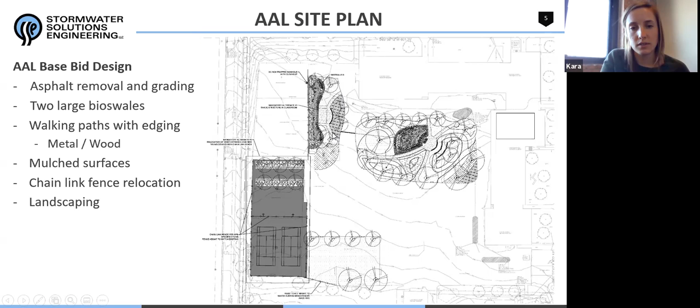The chain link fence currently goes out to here and across, but we're looking to remove all of that chain link fence, relocate it so it goes north-south this way, and then reorientate the parking in this location. So that was part of the base bid.

There's a few alternates for AAL. The first alternate is a shade structure in this location. It's going to be, if everyone is familiar with what we did last year, a monoslope Poligon structure that was spec'd out. We spec'd out the same structure here, and we were able to secure the engineering drawings for those. So if you were to go with a Poligon structure, we could work with you to use those engineered drawings.

Alternate 2 would be all the wood elements. So we have the nature play here, the willow tunnel, the log seating, the seating nooks, and a log border. Those details can be found in the landscape plans.

Alternate 3 would be this whole area over here, where there's an existing tennis court in this location and an existing tennis court here. We're looking to remove all of that asphalt, resurface this whole area, put in new chain link fence around this area, and only convert it to 2 tennis courts instead of having all 4. We'll open up the fence here, creating an entrance through into the playground over here, and add basketball hoops, 2 of them in this location. So all of that work is part of alternate number 3.

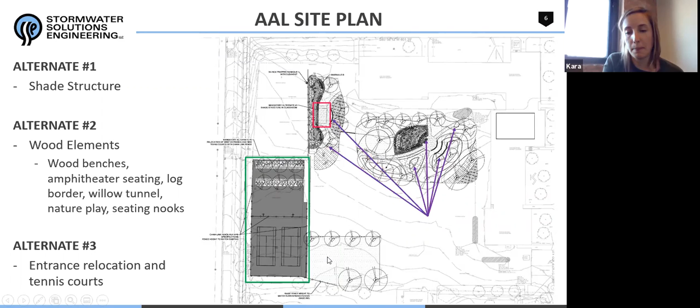One thing I'd like to point out: we did have a sewer investigation done on this property. The survey wasn't fully clear on where some of the utilities were going, so we had a contract and investigated some of that. We will be cleaning out the sewers within the playground prior to construction. There's debris in some of these storm sewers, and there's an electrical line that we found, which you'll see on the site plans.

I was going to zoom in, but that won't work. There is an electrical line that we found that goes through the storm sewer here, so we'll end up bulkheading the storm sewer in this location that's within the bioswale, and just leave it in place. We'll build the bioswale around that sewer.

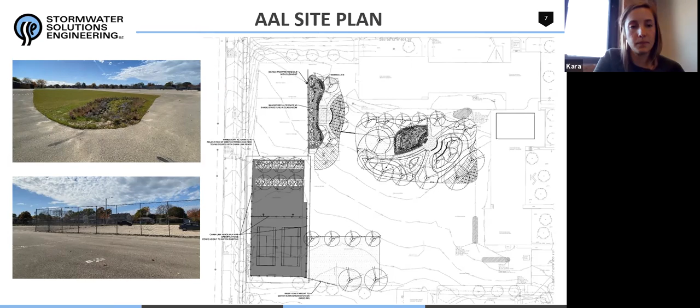The next one is Bay View. Very similar across all the boards, we're looking at majority asphalt removal and grading. Here we have 4 bioswales - 1, 2, 3, 4. And this bioswale here has an underground cistern that is connected.

There is a trap manhole here, so that underground cistern includes a new vault manhole that will get connected to that sewer. Here we have the same walking paths with edging, and we also have a brick border. This is something similar to what we did last year at Clement, where the school had some bricks that were engraved, and we supplemented those bricks and created a border. There will be some coordination on the amount of bricks that we have, or that the school is interested in obtaining for that.

Also here, we have an amphitheater classroom. This is a concrete stage here. This is another classroom in this location as well.

For the walking path right in here. So there's natives within this location and bioswales, and we want to reuse those flagstones from this location as the pathways.

The alternates, right now alternate 1 is the bioswale underground cistern with this diversion. We're looking at redoing this, rethinking what this looks like.

We are not allowed to divert the stormwater into the property, so we'll be changing this up, but it's going to remove the bioswale and the underground cistern.

The alternate 2 is this garden classroom. Right now this is all sod in this location, but we're looking to put in some crushed aggregate here and mulch surfaces so we can relocate the planter boxes and in the future add picnic tables and stuff like that. Alternate 3 would be all the wood elements throughout the site, the seating, the borders, and nature play, everything that's identified there.

Kara, can I just jump in real quick? Can you just go back to that last one?

So to be really clear, what Kara just said is removing the bioswale and underground cistern, alternate 1 on the left-hand side. There still is a different underground cistern that Kara mentioned, and that's where she's pointing it out. So there still is an underground cistern. That's something that we'll need estimates for or bids for. Just to be very clear, we're not completely removing all of these underground cisterns, just one of them. Thank you.

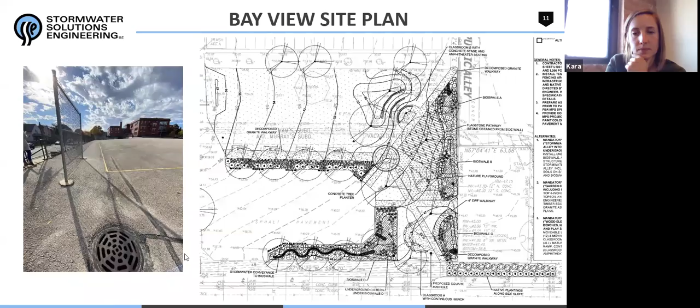The next school would be Fratney.

Similar, removing asphalt. All of this asphalt is going to be removed, same within this location. We only have one bioswale here, and that bioswale has an underground cistern in this location.

We're looking at one thing, there's some chain link fence removals here. There's a kickball chain link fence removal here, relocating a chain link fence here, and relocating it along this edge so we can—currently it kind of shuts off this access point, so we want to move it out.

In this one, all of the nature play is part of the base bid. So we have a few nature play areas here. The log borders is also part of this base bid, and some freestanding benches. And then the mulch surfaces, and we have crushed granite with edging there.

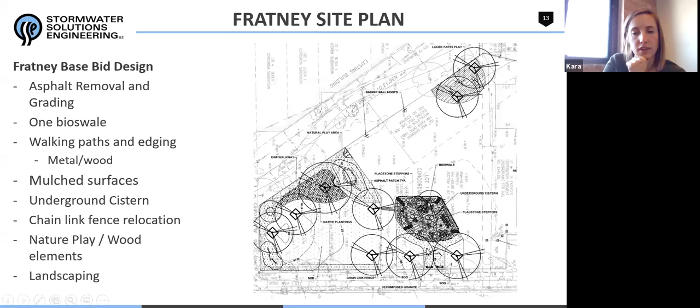The alternates for this one. So this is kind of what we were just looking at. On the northwest side of the property, there's an outdoor classroom. Right now, this is all grass in this location, but looking to remove some of the grass and put in crushed aggregate or granite pathways and a classroom space, some stump seatings, and seating along here, and then having a wood stage in this location, along with all of the landscaping.

Alternate 2, currently there's a rubber surface for this tot lot. We are looking to resurface that, so remove all of what's currently here and just replace as is for this alternate.

Alternate 3 would be this whole entrance relocation. Right now the entrance comes up this side, and this is their main entrance here. They want to have a main entrance from the street.

So removing this concrete, putting in concrete here, and they have an existing sensory garden with some benches already, but looking to expand that and bring it all the way to this entrance. There are some other removals, including concrete stairs here that will need to be removed as well.

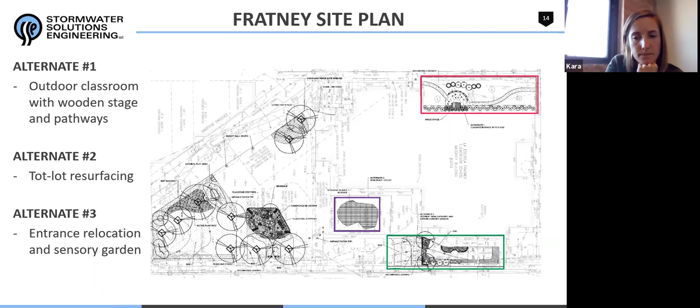You can see this is that main entrance. They want this pathway more defined, move the pathway a little bit more to the south, remove the stairs access here, and extend that sensory garden all the way up this way.

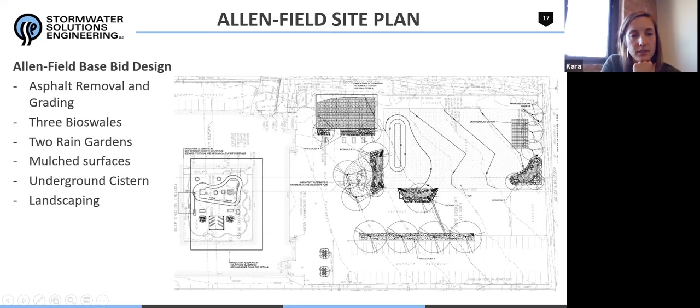3 bioswales, I think I said 2. All that's part of the base bid.

And then for the alternates, in the plans there are architectural drawings for the entrance, the new entrance from the library to the center courtyard space. So that's in this location.

Alternate 2 would be everything in this classroom, this courtyard space. We have a pavilion proposed here, which is different than the other structures we've spec'd out. One thing about this courtyard space is the only entrance is a door through the kindergarten classroom at this point.

So we have to come down - there's a ramp here that comes into this basement, and we'll have to go through some doorways. So we worked with the manufacturer to make sure the different components could be brought in by hand to this location, and we're also looking at mounting it with bolts instead of putting it in footings.

But all of that will have to be designed. We don't have the engineered plans for that.

And then some landscaping - there are some existing planter boxes here, 4 of them, with plantings in these 2. Relocating, there's play sand in there, and converting this into a discovery nook, and doing some painted play for the tricycles.

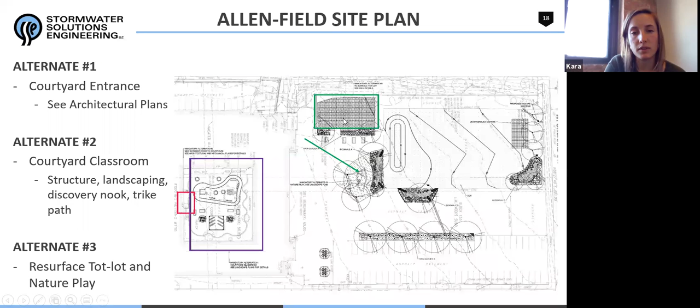And then alternate 3 would be to resurface this area with, not permeable, just rubberized surface in here, and then the nature play. Currently this is all EWF, so that would have to be removed and replaced.

This is a picture of what that outdoor classroom looks like. That doorway would be located approximately through here. That discovery nook would be one of these guys. These would be planted in sand in this one.

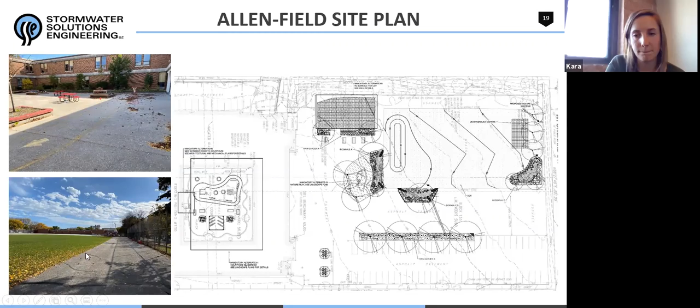Just another location of the schoolyard. And then we have North Division High School.

This one, the main stormwater feature would be permeable pavers with an underground cistern in this location. So there are existing tennis courts here.

All of the runoff comes off the tennis courts. We have some details to manage that runoff from the tennis court before it goes into the permeable pavers. And then all of the landscaping in the front would be part of the base bid, along with the walking paths - one's granite and one's mulched.

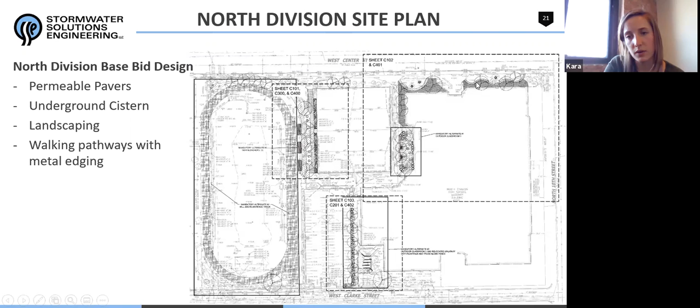And then we'll go on to the alternates. Alternate 1 would be this classroom here. Currently there are some trees that need to be removed, the sod and some pavement needs to be removed as well. Putting in crushed granite and some planter boxes with plantings and picnic table seating.

Alternate 2 would be the classroom along down here. This would include replacing the grass along this chain link fence with plantings, and relocating the entrance up the side so it's a little more uniform, and putting in some seating in a classroom space here.

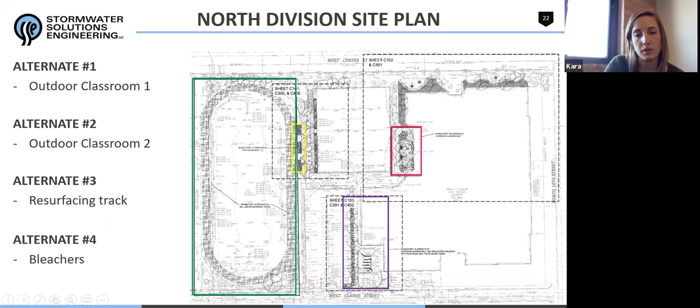Alternate 3 would be resurfacing the track - removing and milling all of the asphalt and then resurfacing. We have details on that. And then alternate 4 would be installing 3 bleachers along the side.

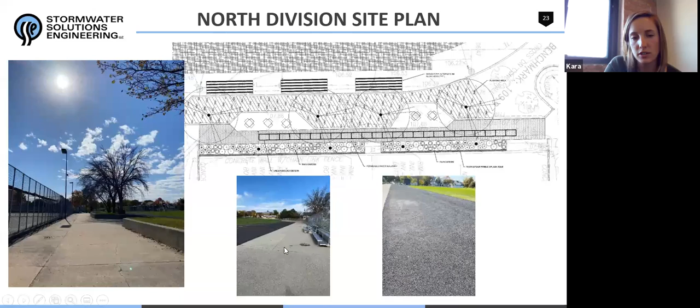Just some photos, kind of close-up area. The permeable pavers would be along here, a rain garden along this way. And then we have this, I'm calling it a Riverstone pebble splash zone, so that when the water comes off of the tennis courts, it's not eroding our rain garden feature. And then this would be the location for the bleachers and resurfacing the track.

This is the location for the outdoor classroom 1. There's some more pavement removal along here, and removing these dead trees and reconfiguring that area. And then in the front, re-landscaping in the front.

And then the outdoor classroom 2, adding in new concrete along kind of closer to the chain link fence. This you can't quite see on here, but it's removing all of this concrete, putting in sod, and then we have some concrete precast seating to install along in the spot. And then this little current seating brick thing will have to be removed.

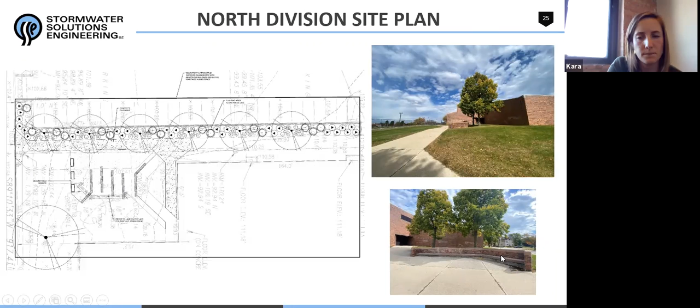If you worked with us last year, there's just a couple changes that I want to make note of. The bioswales, last year we had the media all the way to the ends. This year we're just doing adding the media and the storage aggregate just at the bottom of the bioswale. So the side slopes would be all topsoil.

We also added buffers in locations where we have potentially like the log borders, where we have the posts that will need to go into the media, so creating a little bit of a buffer so it's not right in the bioswale.

We have the cobble channel inlets. I made a note to make sure that they extend 2 feet into the bioswale, so the length varies depending on their locations.

And then we added an asphalt curb, this is only around the bioswales. Here too, kind of seeing from year to year that the runoff doesn't necessarily sheet flow nicely into the bioswales. So removing that 1 foot around the bioswale and replacing with a curb, something that's rolled that we can divert the water into these inlets. So instead of having inlets all over the place, we have specifically targeted sections where there's those cobble inlets, and then creating a curb-like feature that will help divert the water to those inlets.

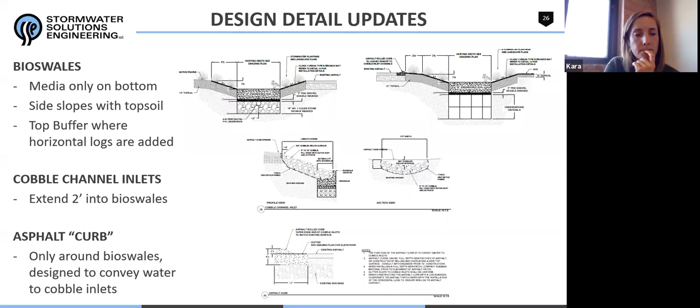The flagstone pathways, we have them through some of the bioswales, adding gator dust. That helped tremendously last year. It was something that we did and it worked very well.

The horizontal log borders - last year we had the black locust stumps as post, but here changing it up, using 4x4 pressure treated lumber will help save on costs for that.

And then the crushed red granite, we are not having a stabilizer. We did this at Golda Meir last year, and it seems to be working well. We still want the really fine material, and I think there was like 1 or 2 suppliers out there, but make sure you submit - we don't want the larger stones in that.

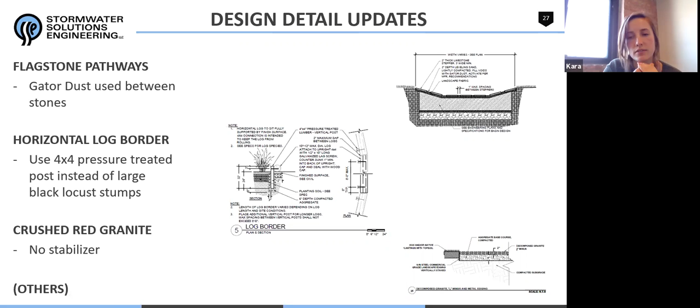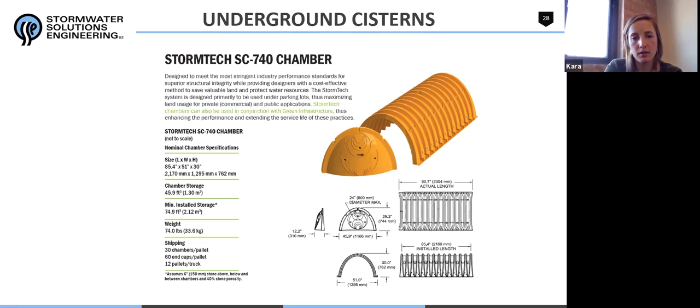Some of the cisterns - this chamber is used at North Division and Brantley. I'm open to other alternatives as well, or materials, but this is just kind of storage underneath the bioswale or the pavers, providing extra storage for those locations. So it's not lined on the top, we just have a filter fabric, drainage fabric on the top that you'll see in the details.

And then at Bayview and Allenfield, we have the Aquablox system. We installed this at Golda Meir last year. At Bayview, it is under a bioswale, so here we have just a drainage fabric on the top with some pea gravel before the media is put on top of that. And then at Allenfield, it's under the grassed area, so we actually have it completely sealed through the top - the whole thing is lined, not just lined on the bottom and the sides. So those 2 details are a little bit different.

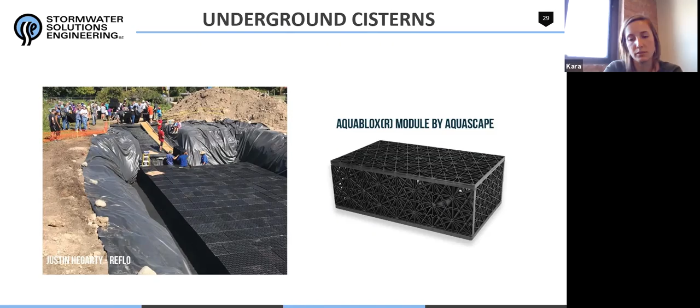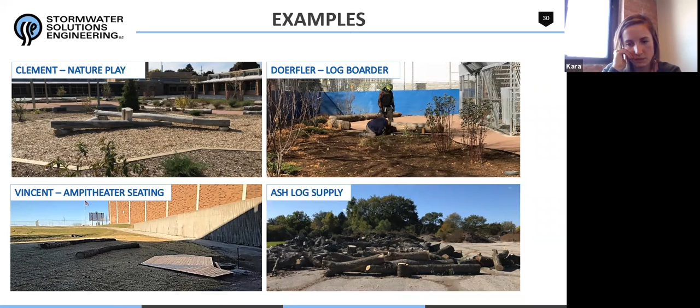I guess these are just some example pictures. This is of that 4x4 pressure treated wood for the log borders. Some of what the nature play will look like, the amphitheater log seatings, and MPS does have a supply of ash logs. This is at Vincent High School, so we can coordinate on potentially using some of these logs in some of the designs. I think that's it.

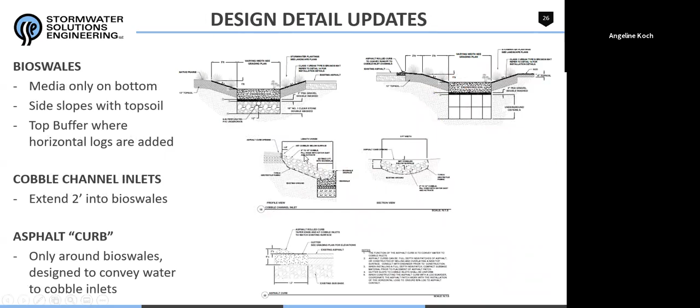I also wanted to note that for the plans currently at AE Graphics, there are references to some striping, but the striping sheets aren't included yet, particularly for AAL and Fratney. Those striping, seal coat and striping plan sheets will be updated shortly. It's going to be similar to what we saw at Clement last year, with some bike paths and more colorful hopscotch designs.

At the same time, we'll update the Bayview alternate 1 with the removal of the underground cistern and bioswale, and the plan for more of an outdoor classroom feature that Kara referenced earlier. So those are a couple of updates that should come out this week across both bid sets.

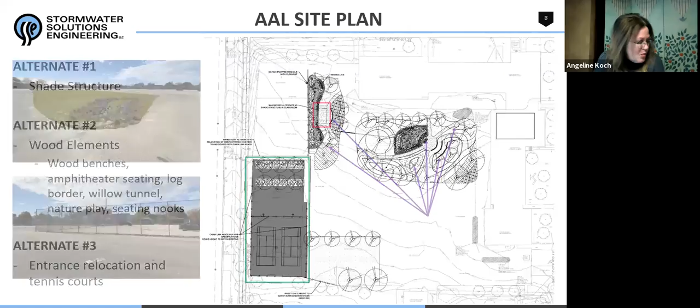When the bids are due in February, these bids and contracts awarded will go to the March board. If we get really great competitive bids within our secured budgets, it would be awarded at the March board. So if you're planning for your summer, the contract would be awarded preliminarily after bids are due in February, approved at the March board. You would get a notice to proceed probably before that to start securing materials and things, but it would be a March board contract award.

I would like to clarify one thing. For all the asphalt removal, I have a note saying the sub-base can remain in the sod areas. But in areas with any planted areas, we'll have to remove all of that, since we need 12 inches of topsoil in those locations. Under sod, we only need 4 inches, but keep in mind sod has a depth to it as well. We want to be able to get the water to flow onto the sod location, so even though you can keep the base in this location, you may have to move it around so you can get 4 inches of topsoil with the sod placed on top of that native material, if that makes sense. We don't want the sod being a barrier to the flow because it's sitting up higher.

We are trying to manage fill on site. There's some locations like Bayview currently where it's not all being managed on site because of the space available and how much we're removing. However, if we're removing that alternate, we may be able to put a little bit more here. We'll try to work on that. AAL is pretty cut fill, net zero, and Fratney is pretty close, with some sub-base that needs to be removed. Allen Fields, you'll have to remove some sub-base, but a lot of that we're trying to manage on site since we have that fill location there. For North Division, everything will have to be taken off site, we don't have any fill locations on that one.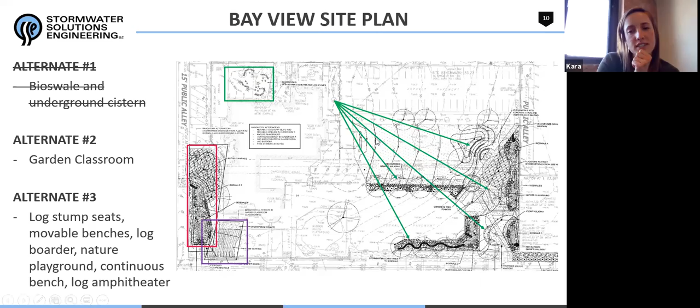Just to call attention to quantities listed on the plan docs, we do have on the legend and notes page a little table of some of the quantities we put together. However, please still check quantities, but it's there to help distinguish between what's in the base bid and what's in the alternate. So that's for your use.

I don't know if I have anything else to add. Thank you.

Will MPS mark private lines? No.